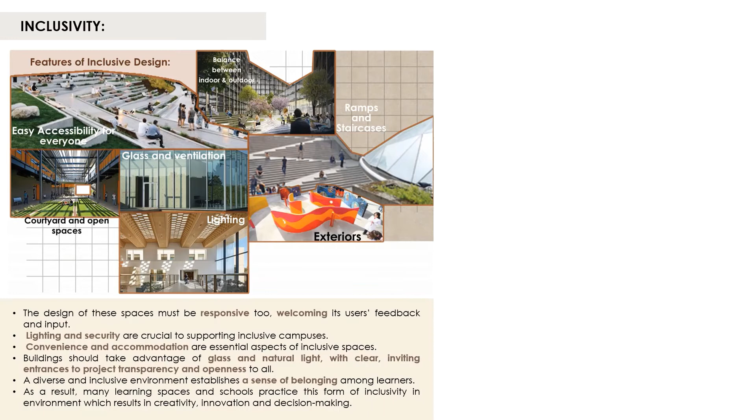The elements of inclusive design are mentioned in the chart. Some features of inclusive design which can be seen in the spaces are disabled-friendly accesses, open spaces for connectivity between built and unbuilt, proper lighting and visible sightlines for enhancing the security factor.

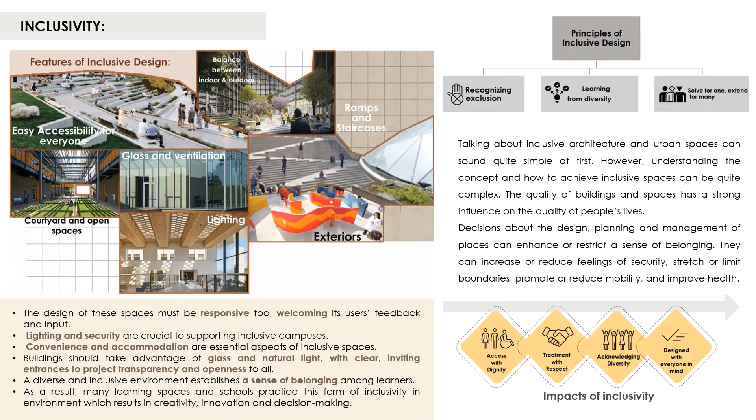Impacts of inclusivity are accessibility with dignity, acknowledging diversity, and designing for everyone. Due to all these factors, many public spaces practice inclusivity in environment, which enhances a sense of belonging, promotes mobility, and improves well-being of users.

The next topic is about data collection, which is subdivided into 3 major categories. The first category is about the stakeholders. It briefs us about the roles being played by NSDC, MSC, and various training partners.

The next topic is skill mapping through Rozgar and Kaushal Melas, which create awareness and opportunities. The third topic is about the skill sectors which fall under the Mahila Vikas Kaushal Yojana, which could be implemented in the center.

The research question is based on how to create an inclusive environment for women where collaboration and conversation will take place. This brings us to the concept of converse, collaborate, and create, which talks about the aspects of communal learning spaces. Community-based learning is a teaching and learning strategy that integrates meaningful community engagement to enrich the learning experience.

Multiple pointers which are considered under the subheadings of quality of spaces, safety in learning environments, inclusivity, flexibility and collaboration in learning areas, and accessibility are shown through various illustrations.

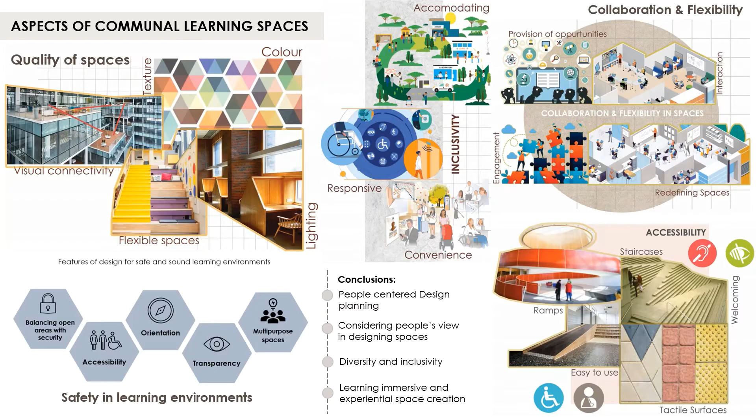The conclusion of the study, in short, speaks about how learning environments can influence learners' experience in a communal space. There are 4 case studies which I have tried to look into on the basis of design and program.

The first case study is about Manav Sadhana Activity Center designed by Yatin Pandya, located in Ahmedabad, Gujarat. It is a multipurpose activity center which acts as an informal school, provides evening education for young adults and serves as a training center and activity workshops for adults, women and elderly.

The center focuses majorly on the central courtyard along with the other ancillary spaces on the periphery of it. Sustainable materials like fly ash bricks, recycled bottles, reused metal parts, etc. are used in the construction of the structure.

This center has helped the nearby residential and slum settlements to grow on the basis of economic and social aspects.

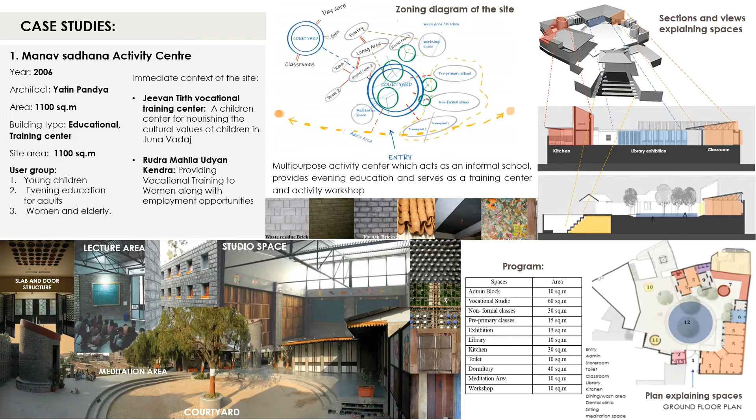The second case study is about Jetavan Spiritual Center designed by Sameep Padora and Associates, which is located in Sakharwadi, Maharashtra. It is built for the spiritual and skill development of the community. The center is split into 6 buildings, each in the gap of heavy planting.

The 2 courtyard spaces have been used as a linkage between indoor and outdoor spaces. The inverted roof profile tries to bring in the light and amalgamates nature with the structure.

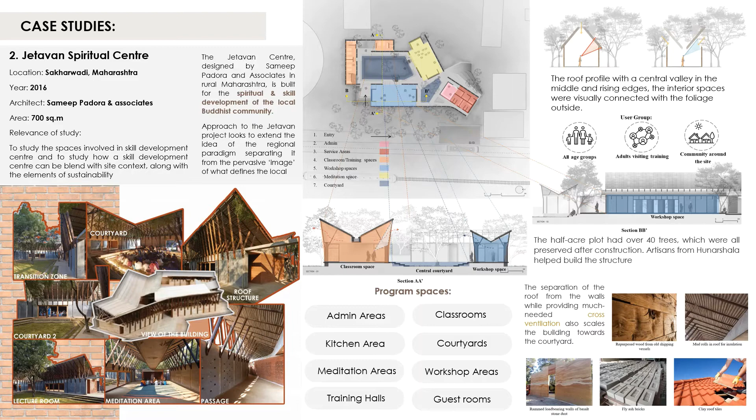Various construction materials and techniques like repurposed wood from old ships, fly ash bricks, rammed load-bearing basalt stone dust walls are used. The approach to the Jetavan project looks to extend the idea of regional paradigm, separating it from the pervasive image of what defines the local.

The third case study is Women's Opportunity Center designed by Sharon Davis Design, which is located in Rwanda, Africa. It is a community center and training facility which has been developed with the objectives of creating economic opportunities and rebuilding the social infrastructure. The project helps women to learn new techniques and implement them on the 2-hectare farming landscape which is abutting the facility.

The elements like scale, security, community growth, privacy, clarity have been adopted while designing the center. The facilities and program of the project are mentioned in the table.

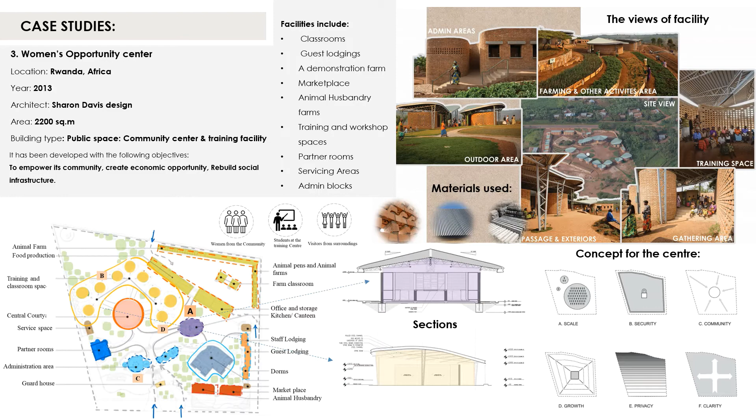The waste management of the site and the construction of the structures are done using materials like handmade bricks, asbestos sheets and concrete, which is done by the women of the community. This center helps in creating a stir in the adjoining community by creating various employment opportunities which encourage women to actively participate in it.

The fourth case study is about the Community Center in San Bernabe, Mexico, designed by Pich-Aguilera Architects. The project offers a building street concept in which programs are dispersed volumes arranged along guidelines. The structure focuses on providing courtyards as breather spaces between buildings, creating massing effects. A public plaza is specially emphasized to maintain the relationship between individuals and the community center.

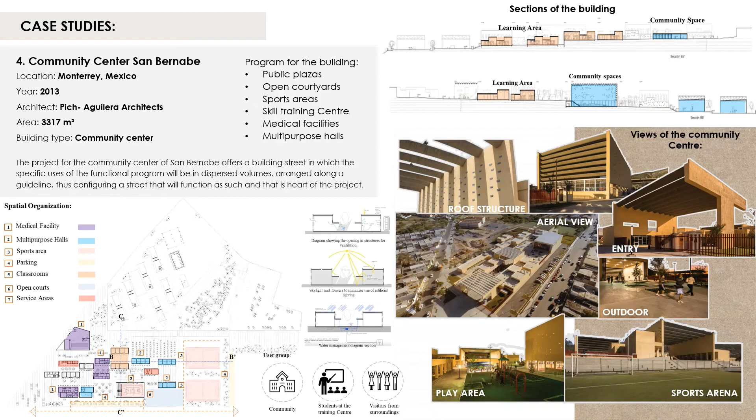Various construction materials and techniques like pre-stressed concrete joints, expanded polystyrene walls, and insulated walls with cellular concrete systems are used. The project is not only about generating a public building and sports facility, but about creating a safe space for community center users.

The inferences and conclusions of the case studies are: all the case studies have a user and community oriented approach towards designing the spaces. The first, second, and third case studies mention various construction material techniques which act as an effort towards environmental sustainability. All the case studies have central gathering spaces, social spaces, and public plazas which emphasize the topic of converse and collaborate. The architectural elements used in all the projects are in context of the surroundings and create a flexible, efficient space which impacts the user experience.

For site selection and analysis, I have chosen three sites. The first site is the Vasai Virar region, specifically Vasai East. The land use of this portion of the site falls under the institutional category. The climate is hot and humid with heavy rainfall in the monsoon season. The topography is plain land with negligible contours. The site is accessible by Vasai railway station, located nearby.

The second site is in the Talegaon region near Pune. The land use of this site is under the institutional sector. The climate is hot and dry with medium rainfall in the monsoon season. Accessibility to the site is by Talegaon railway station and bus stops located in the adjoining area. The site is connected to major cities of Mumbai, Pune, and Nashik.

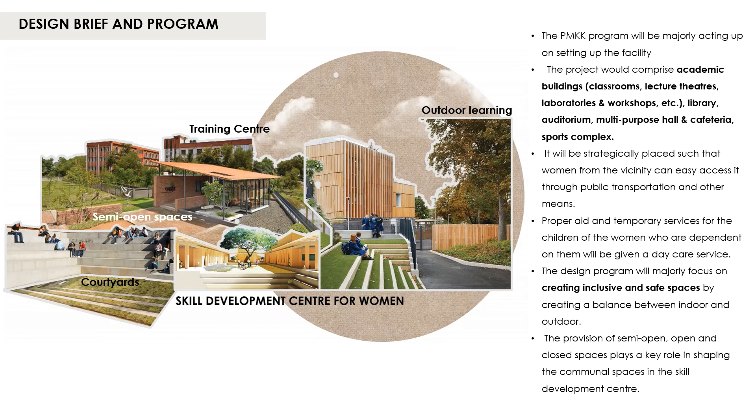Talking about the design program and proposal, the government would majorly help in setting up the center. The project will have various features from the Pradhan Mantri Kaushal Kendra guidelines which will be used in the project. The design program will majorly focus on creating inclusive and safe spaces by creating a balance between built, unbuilt and landscaped areas. The project will be divided into zones, namely institutional areas, training spaces, communal areas, sports facilities, leisure and recreation spaces, etc. Formal and informal learning spaces, studios, and workshop spaces will be key elements in the project.

A special emphasis on the well-being of women, on the basis of physical and mental factors, will be done by providing meals, health checkups, and other facilities. Also, an additional feature where dependent children will be provided daycare services in the center will be done. The focal point of the center would be creating inclusive spaces for women.

In conclusion, the design will be in a holistic manner which will ensure creating welcoming and safe spaces for women irrespective of their background. Thank you.